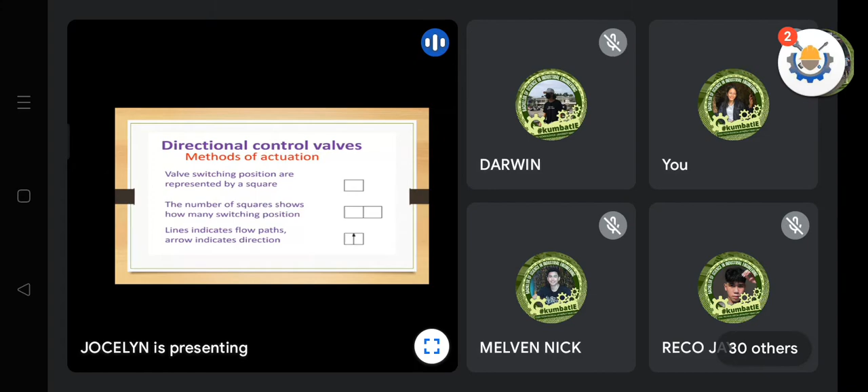So now, your task is valve switching, guys - shifting positions. Remember the 2/2, the 5/2, the 5/3 - those are the positions that we had. Now, any valve switching will be represented by a square, and the number of squares shows how many switching positions, which could be 2, 3, or 1. Now, the lines inside the square, I will give you a schematic diagram.

You need to label what symbols you see in the schematic diagram so you will understand. If you're already familiar with the symbols and labels, then it's easy to see. Any questions? There's no share screen yet.

Okay, cut me off guys. If ever I miss something, let me know. Let it go straight through. Okay, so it's very important, guys. Let me know if it's already okay, and cut me off if there's a problem.

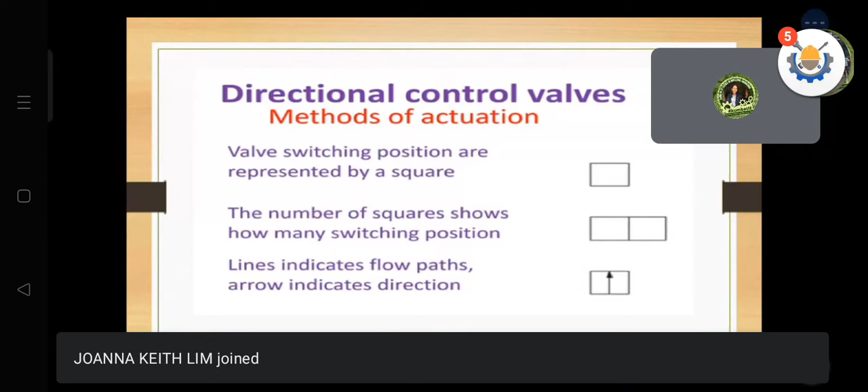So the lines inside the square, guys, indicate the flow path. The indicator shows where it's heading - let's say first step, second, third, or fourth, depending on the valve being used. So the valve determines where the pressure directs the air going to the output, which is on our cylinder. Later on, as we go through the slides, you will understand everything.

So the lines indicate that it is closed. If you see here a vertical line - vertical, then horizontal, then vertical again - once you see this type here, that indicates it is normally closed.

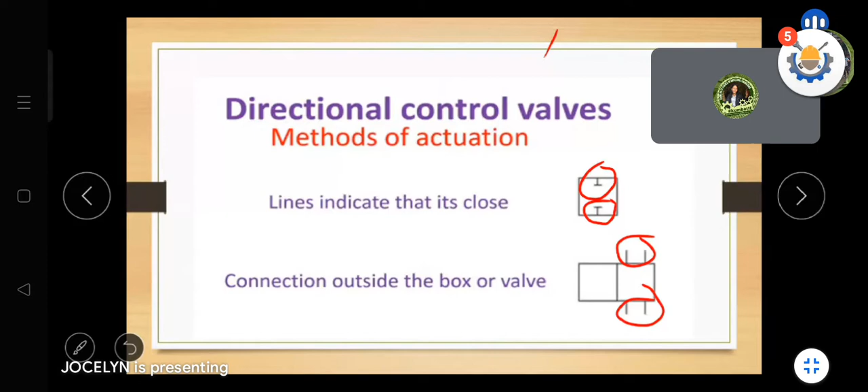Now, the connection outside the box, guys, this is the one here. This will proceed either to the cylinder or to the compressor. That's the way of knowing how we're going to connect this valve to an output or to an input, or any other working actuators.

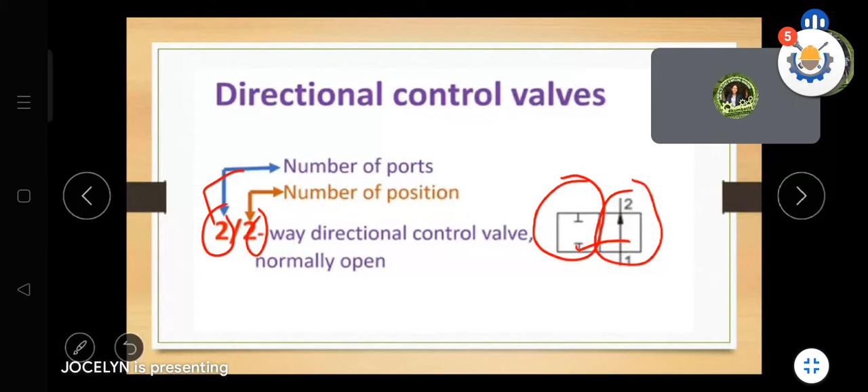This is the one I mentioned earlier - the directional control valves. Here you see 2/2 - the first 2 represents the number of ports, and the second 2 is the number of positions. So the ports determine the box, and for the number of positions, it goes from normally closed to normally open. From here, 1, 2 - that is the position of the valve.

So these are actually the 2/2, the 3/2, until the last topic we have - just a refresher of what we've discussed regarding pneumatic valves. If you see here, this is the actual pneumatic valve when you're going to use a 2/2 way directional control valve that starts with normally open. This is also an example - if you notice, it's used only within that range.

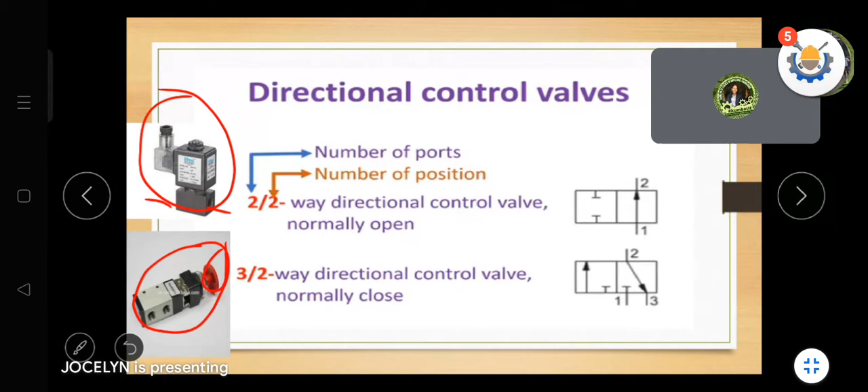Now, for the 3/2 way directional control valve normally closed, this is how it looks. There's manual involvement here - later you'll see it involves manual connections like pushing, like the push button. You see here, the one in red is the manual push button. When you turn it on, air enters, but once you push it, that's the time it goes to the direction of what's done - from 1, 2, and 3. That's the switching part.

So directional control valve, guys, for the 4/2 way direction - this is an example. That one can be mounted, depending on the use and the process we're going to apply it to.

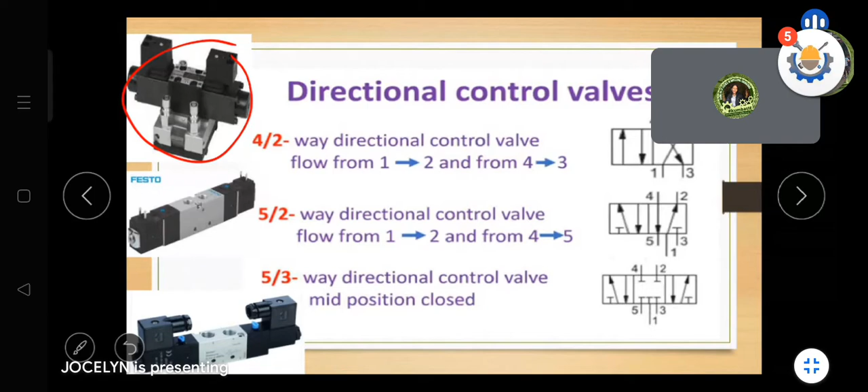We also have the 5/2 and the 5/3 - those are the examples of pneumatic valves. They look big here, but if you see them in actual use, they become small in mechatronics, mounted on their wall, then connected together using wires - to operate the cylinders, whether single acting cylinder or double acting cylinder.

Now, how to read the numbering system. For the numbering system, guys, we have in directional control valve.

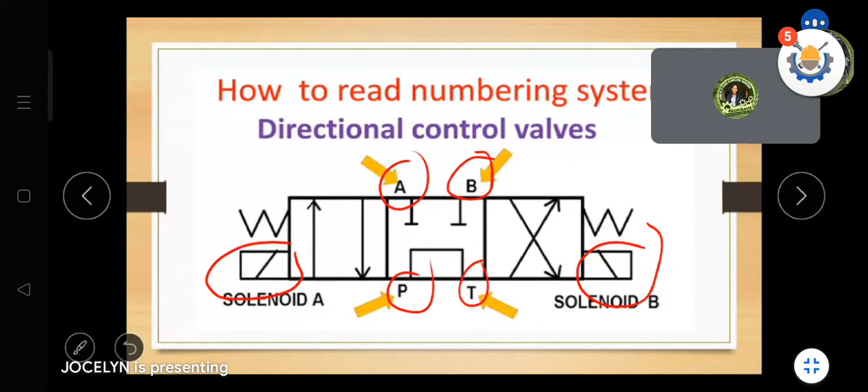So later on you will also see the symbols and signs. This one represents the solenoid A and solenoid B. So you have here directions. You will know what is A, B, P, and T. Now here, this is an example.

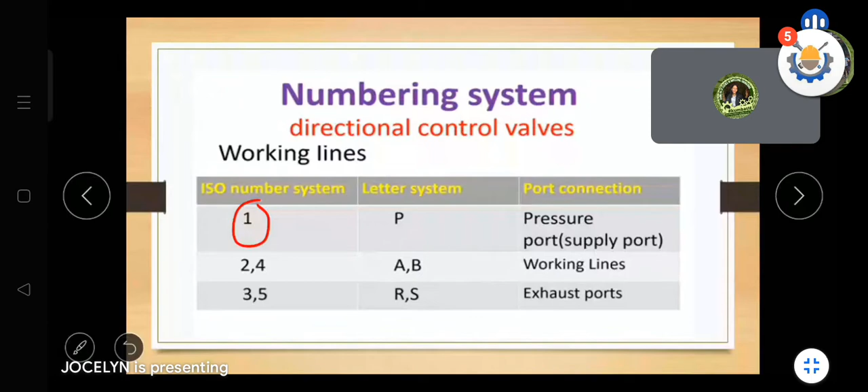So if you're going to check the numbering system, guys, it's already set in an ISO standard number system. When you say 1, guys, that represents letter P, and that port connection is for the pressure port. So if this is 1 here, that is the start. So this is P, that is for the pressure.

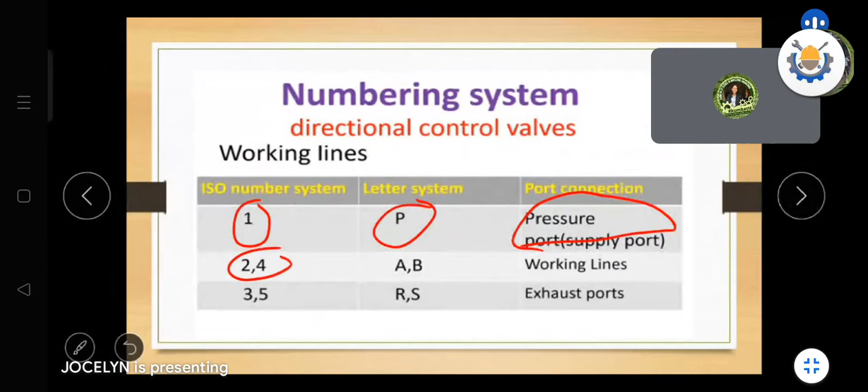Our output goes toward the working machine. So the 2 and 4, guys, that's A and B, that is for working lines. So 2 and 4, that is for the working lines.

See here, so it's A and B. So working lines, guys, and that means this is where we're going to connect the working actuators or the machine that we will be using, for this particular valve.

Now when you say the 3 and the 5, guys, that represents R and S, and that is the exhaust port. So 3 and 5, so it's already exhaust port, and that means once they are already there, so from 2 then it will be going to 3. That means the job has been done already, and then going to 4, which is also back to working, and then rested to 5.

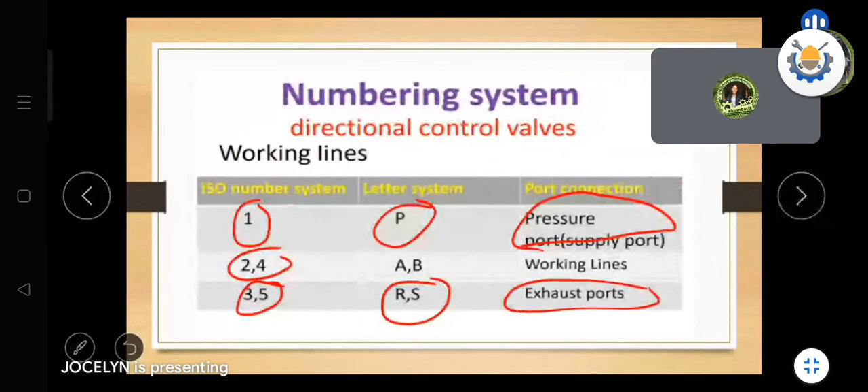Okay, so these are the pneumatic control components and symbols. Okay, so here.

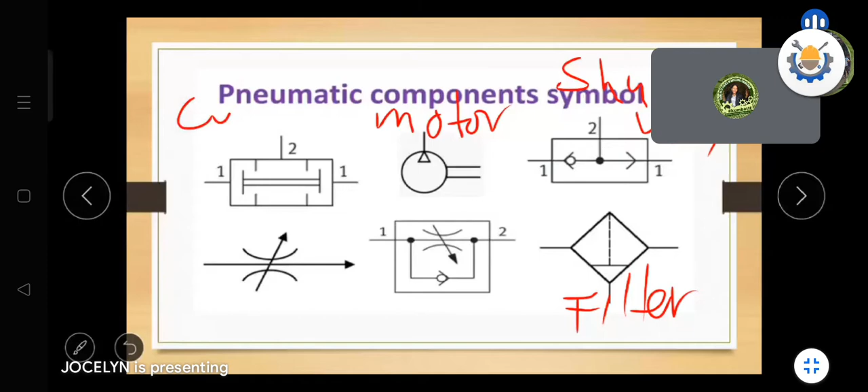Now these two here, I forgot. I wasn't able to remember. But then again, guys, we'll get back to these components. We'll just update those slides here on the one that I have uploaded in the Google Classroom.

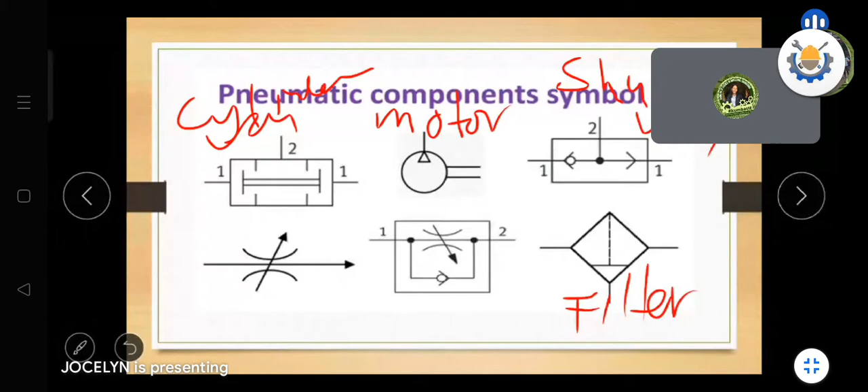Okay, so for the two pressure valve, guys, it has an input A and input B, and then the output Y. So this is similar to a series switch. So the output will not come out if none of the inputs is 1.

If we understand it in terms of logic gates, guys, it is considered as the AND gate. Now as for the gates, AND or OR.

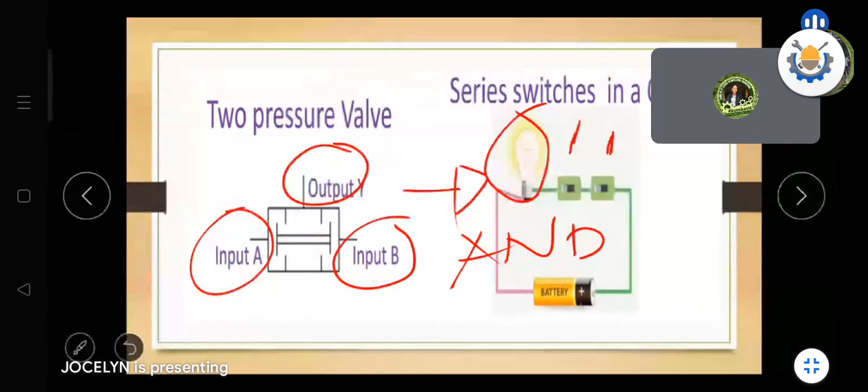So we need to make sure we need to have 1 to 1 value in order to get the output. So that's the presentation of the AND gate. I'm using the AND gate truth table. Using this particular pressure valve, you need to make sure that input A is on and input B is also on to activate or to have the output working. This will only work if all of the input is 1. If one of the input is 0, it's not activated, so therefore we will not be getting the expected output.

So the AND gate is like multiplication, right? 1 times 1, 1. 1 times 0, 0. 0 times 1, 0. 0 times 0, 0.

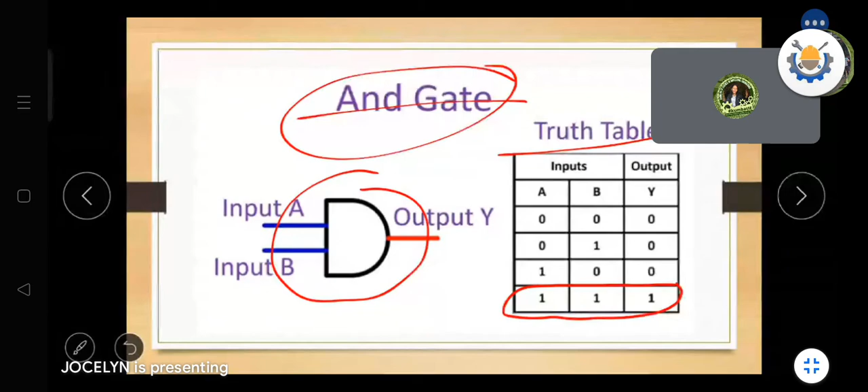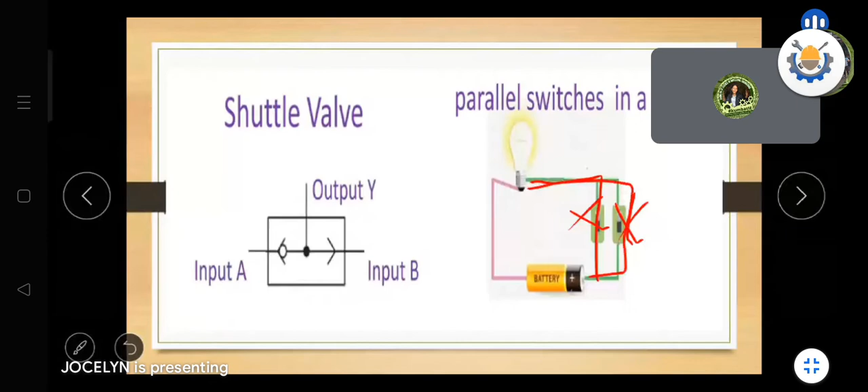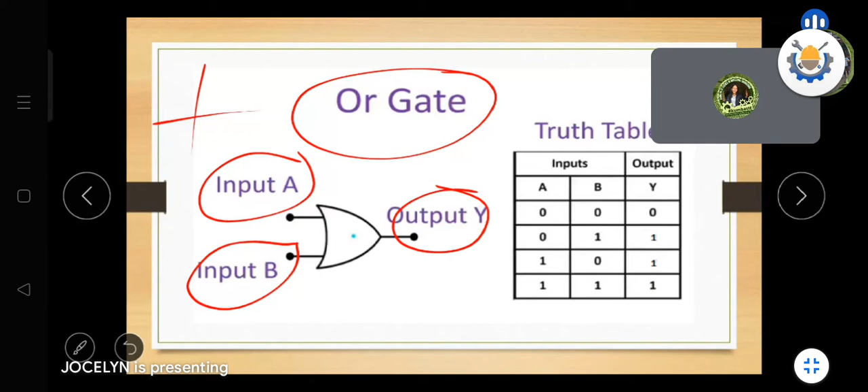But for the shuttle valve, guys, this one looks like a parallel switch. Meaning, if this is 0, it can still connect to the output. Now if this is also 0 and this is 1, it's still going to the output. This is using the OR gate, the plus function. So 0 plus 0 is 0, and if any of the input, either A or B, is on, then the output is 1. So the output is working.

Okay guys, so for the pneumatic component symbols, this is the flow control valve. So this is where, if you're going to see this in the schematic diagram, next meeting we will be introducing you on how to read schematic diagrams and how to label it so we can understand. So if you see this symbol, it represents the flow control valve.

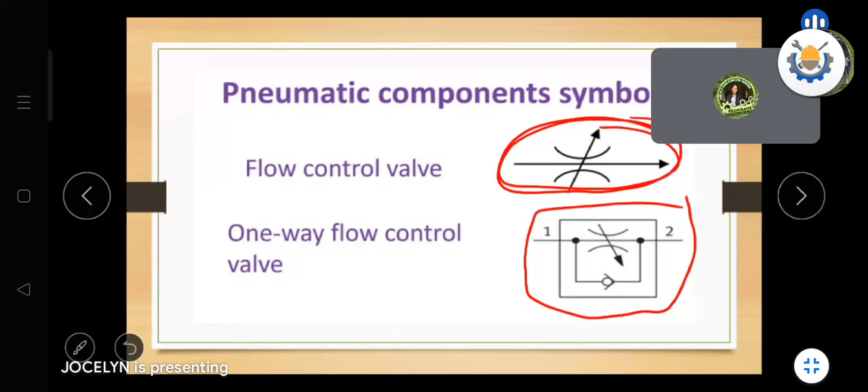Now this one here is a one-way flow control valve. It depends - you can see here it has two outputs, one here and here.

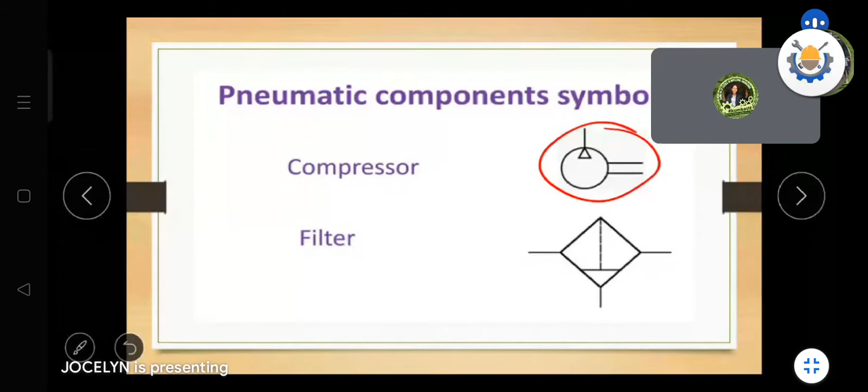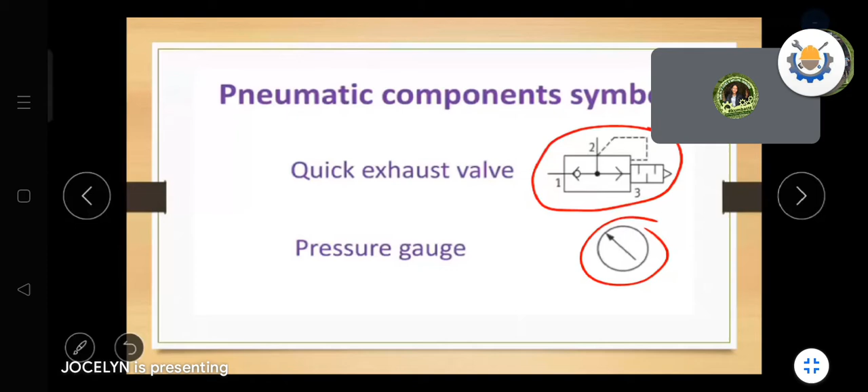Now this one represents the compressor, or could be the motor compressor. This one is the filter. And this symbol here represents the quick exhaust valve. And this one, if you take a look, is the pressure gauge symbol. And you have here the air reservoir. And you can see here the check valve. And then the pressure regulator.

So next meeting, guys, we will be seeing a schematic diagram, and we're going to check all those symbols there and label it, and then we're going to check the flow of the

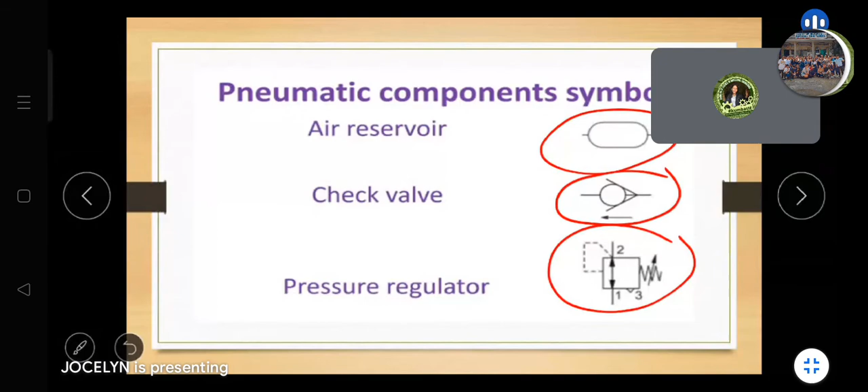working device. Now for the methods of actuation, guys, it could be a spring type or a solenoid. It depends. So solenoid still works the same way, but it is electronically driven. Now it could be a spring, like the spring that

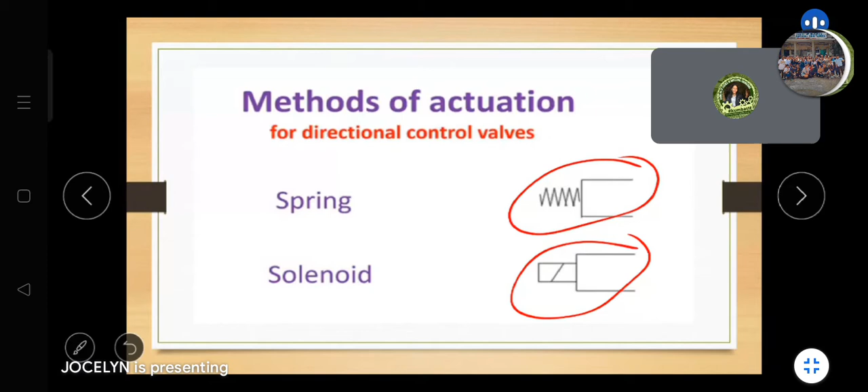for example with the single acting actuators that they're using for spring. The spring is good for one way only, it's good for one direction. Once it's on, it goes straight to that work. It's different from what's used for the single acting cylinder, but for the double acting cylinder, guys, they have two inputs, the push and the pull. So what's commonly used for that is solenoid.

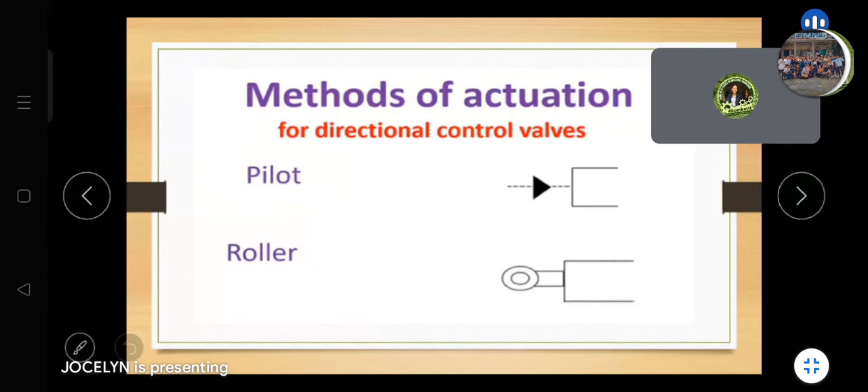Now we have also lever and also the push button. So this is for the directional control valves. And we have also pilot and rollers. So later on, you will see all of these symbols in a schematic diagram, and you're going to read those, what is necessary for the schematic that we will be showing next week.

Now, for controlling a pneumatic cylinder, guys, controlling pneumatic cylinders can be done with the following methods. One is the direct control of single or double acting cylinder. We have also the indirect control of cylinder with single pilot final control valve. We have also an indirect control of cylinder with a double piloted final control valve.

So the indirect control actuation is a pilot signal from a 3/2 NC valve, guys. So 3/2 is another valve, okay?

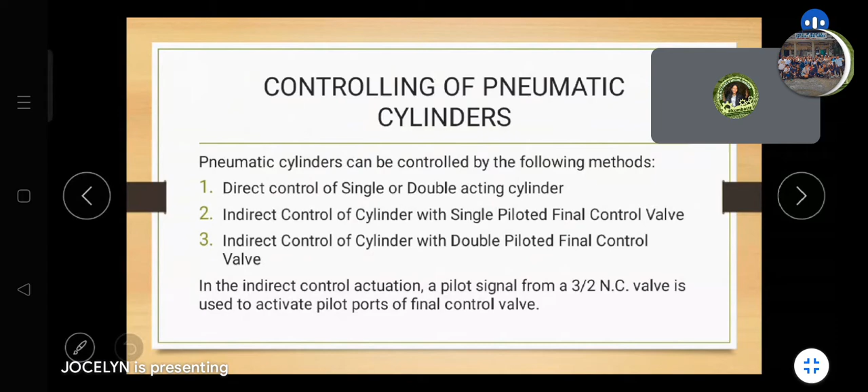NC valve is used to actuate pilot ports for the final control valve. So either we're going to use another port or another valve, or one valve, depende, as long as we are using direct or indirect control.

For direct actuation of cylinders, single acting cylinders perform only in one direction position. Spring type cylinders, usara na siya yung output, padura yun siya gawas. Usara po na iyang connection sa ubos hole, there's only one hole to eject. It is used for return position via spring, and air supply port using the vent hole.

So single acting cylinders for direct actuation is using a 3/2 way valve. So 3 working ports and 2 switching, manually actuated with spring return. Kinahanglan siya i-push to return the manually actuated. So kini siyang mga nakita ninyo sa actuators na itong ipakita ganina, yung mga push button switch.

Now for the double acting cylinder, it performs work in both directions. So it has 2 air supply ports for pull and push, nasa duha ka air supply. And it is using a 5/2 way valve, so 5 working ports and 2 switching, however manually actuated with spring return.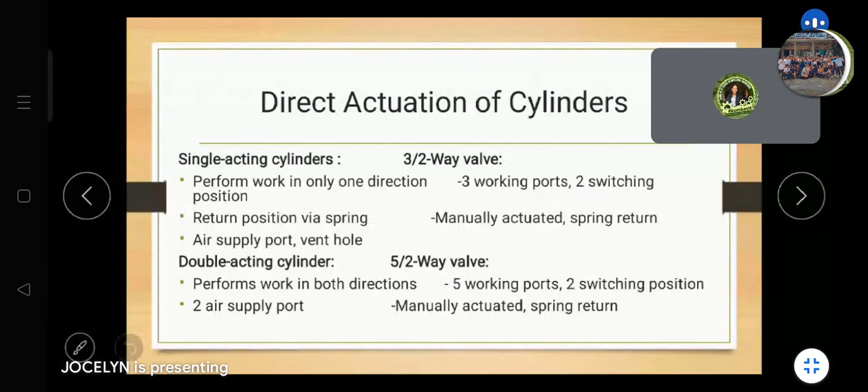So this is how it looks like. If you notice, nakalahi sa single o sa double. Ang single, 1 port na siya, igura na siya mo push here. Ang double siya is nasa duha ka connection, it has 2 air supply port, para sa pabalik.

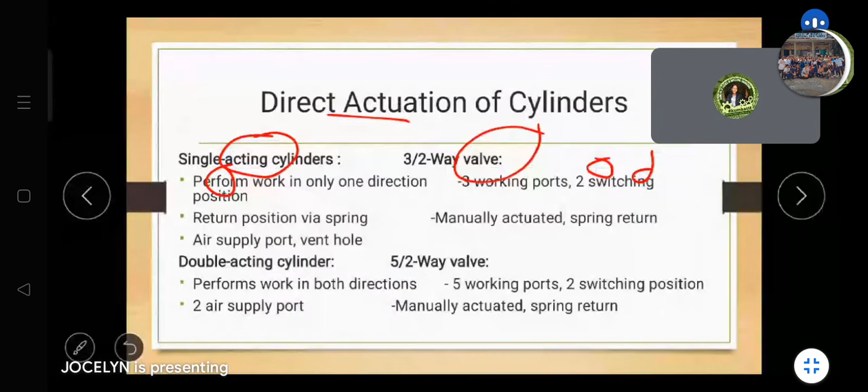Now for the direct actuations, for the single it's using the 3/2, and for double it's using the 5/2. Duha ra ni siya, this one, 1 and 2. So using this is the valve that is used.

If you notice, there is a presence of manual push. So if you're going to push this, what will happen - take a look on the blue lines here. Once it is pushed, it will directly proceed with the cylinders, pushing it towards the output.

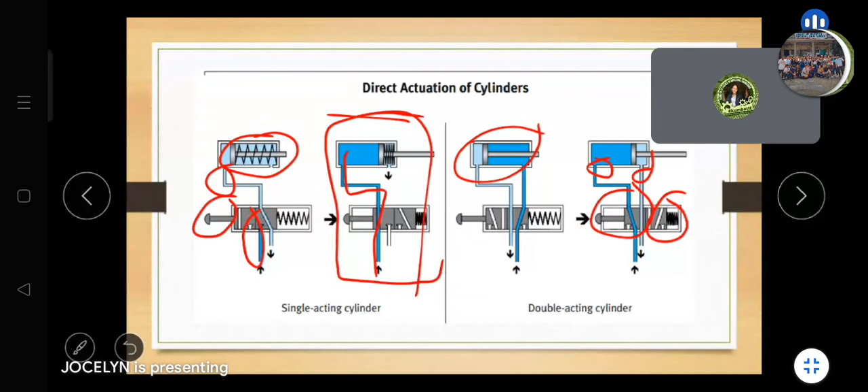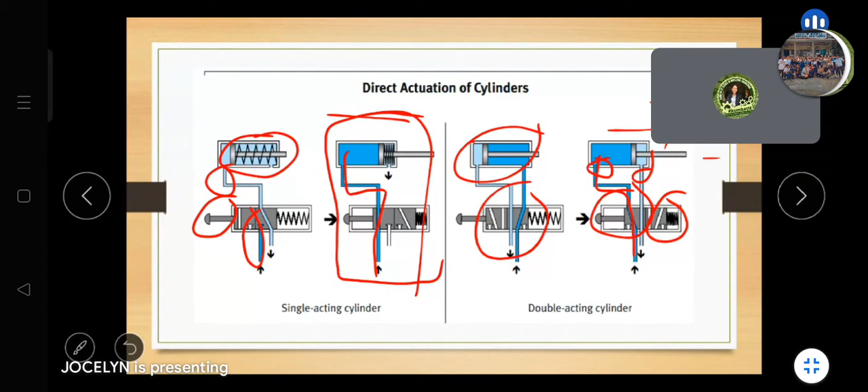Now for the double acting cylinder, you can see this is normally closed here. So once it is pushed, then it will inject air there to release the cylinder. That is how it looks like using the single acting cylinder and the double acting cylinder, but still it is manually driven.

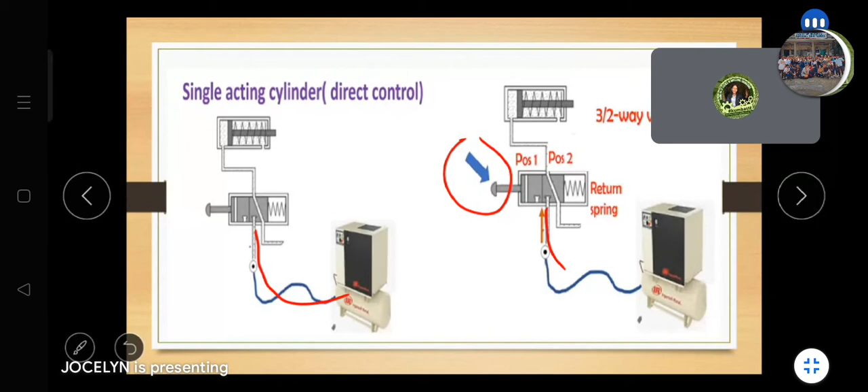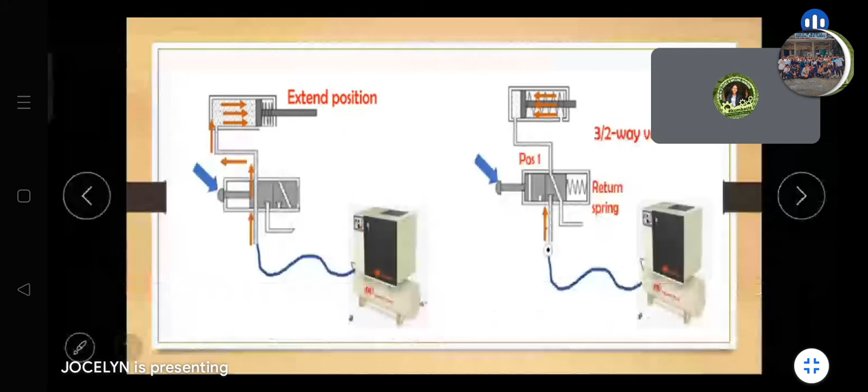So from the air compressor here, take a look. Once imo na siyang i-push diri, once it is pushed, masulod sa dinha, it will open. This is the air, another one. So once it is pushed, na-push na siya, so muna siya, actuate ra, and then it will extend the position.

Mga kuan siya, like for example imong gamiton kay kuan siya kanang naabaroy dire kanang kape or nagkape baron ana, coffee grain. Mo ni siya imong ibutang dinhi ana, naka-close siya, then open, balik siya dire. Depende sa gamit, for example inyong gitrabahoan kay kanang nagpack og kape. So kaysa ikilo-kilo na nimo siya or pila ka grams isudin mo sa jar, pwede na siya magamitan og funnel diri, kani siya imo i-connect din.

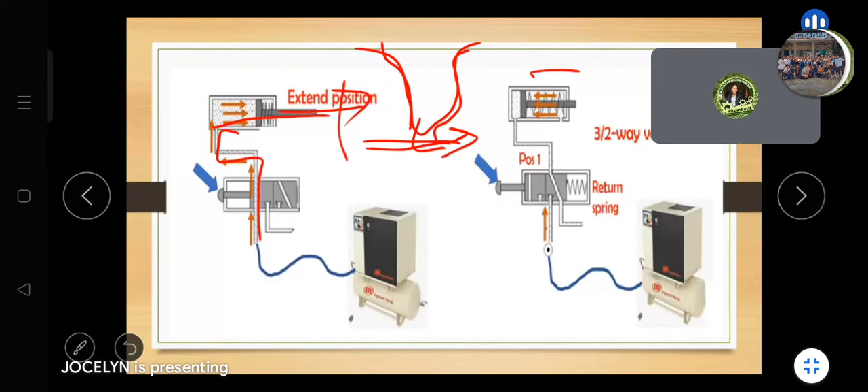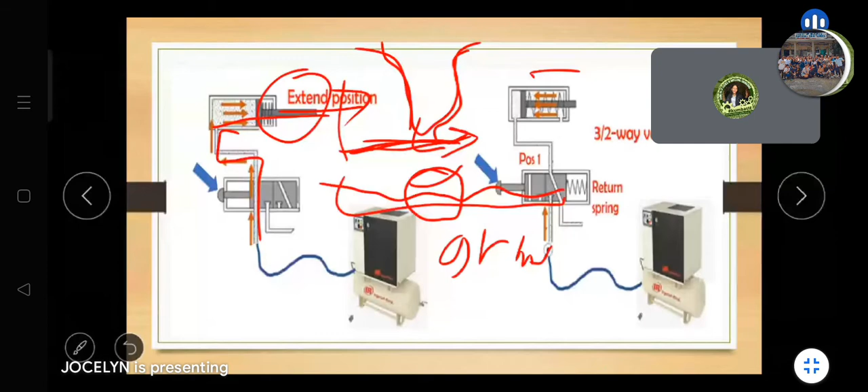So ang output niya ari nas magawa sa ato ang single acting cylinder. So there, it will close here, after na sad open, balik na po siya 5 seconds. Another jar na sad, so naa'y conveyor din nga magdagan-dagan nga mga nagpuno-puno sa jar. Depende ra gyud sa gamit, depende ra sa inyong process nga inyong gamitan.

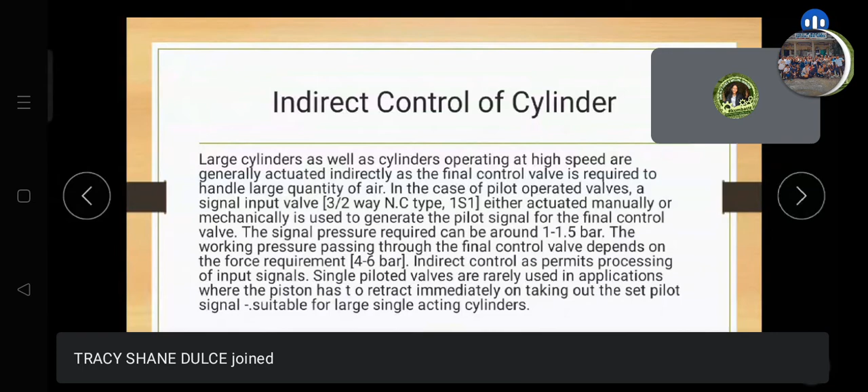For the indirect control of cylinders, large cylinders as well as cylinders operating at high speed are generally actuated indirectly, as a final control valve is required to handle a large quantity of air. So for processes using indirect control cylinders, we are not using just one valve—there could be 2 valves, depending on the process. From the name itself, it's indirect control, unlike direct control where pushing the button directly actuates the cylinder. For indirect control, we could have 2 valves connected, depending on the process we're applying automation to. However, indirect controls are used for large type cylinders.

In the case of pilot-operated valves, a signal input valve like a 3/2 way NC type, either actuated manually or mechanically, is used to generate a pilot signal for the final control valve. Both valves are parallel, but only one is actuated manually—meaning we push one valve button manually and the other valve will be mechanically actuated, using the porting of the first valve used, depending on the program. The signal pressure required can be around 1 to 1.5 bar, and the working pressure passing through the final control valve depends on the force requirements—it can be 4, 5, 6 bar depending on the application.

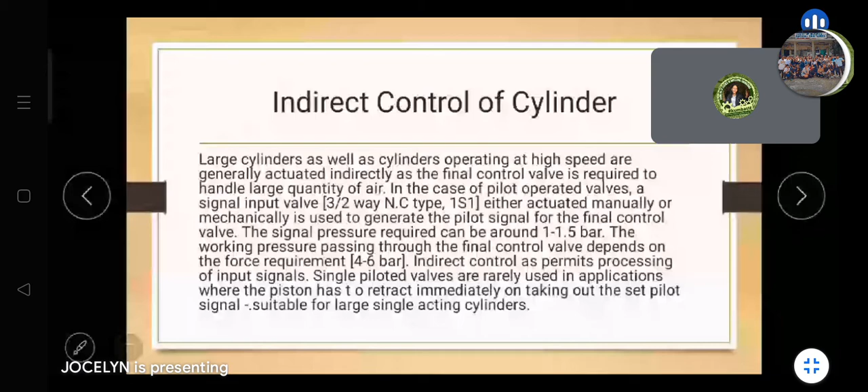Indirect control permits processing of the input signal. Single piloted valves are rarely used in applications where the piston has to retract immediately upon taking out the set pilot signal, so this is suitable for large single-acting cylinders.

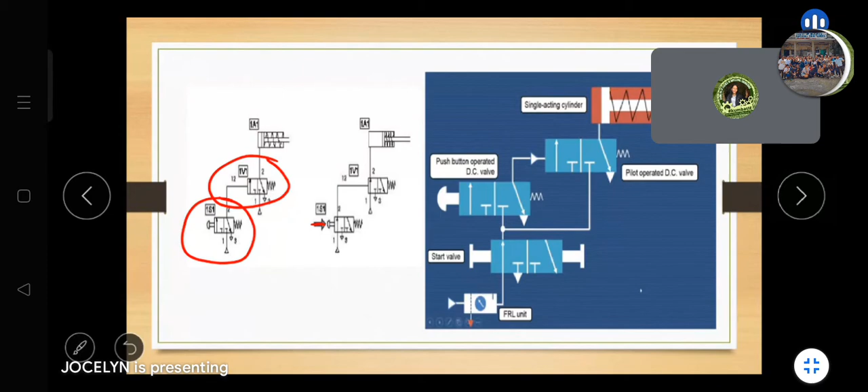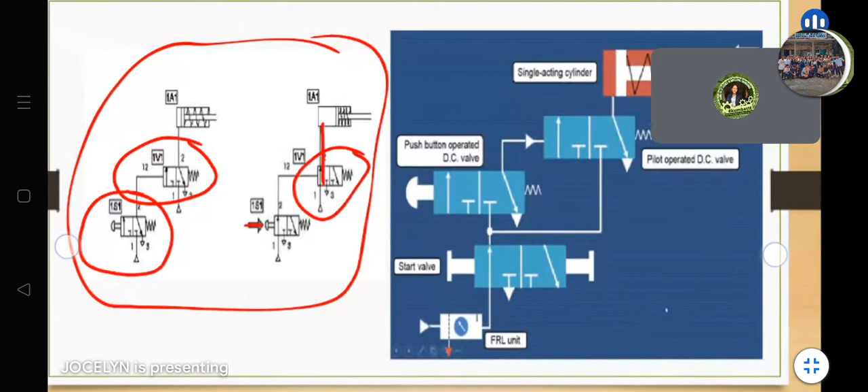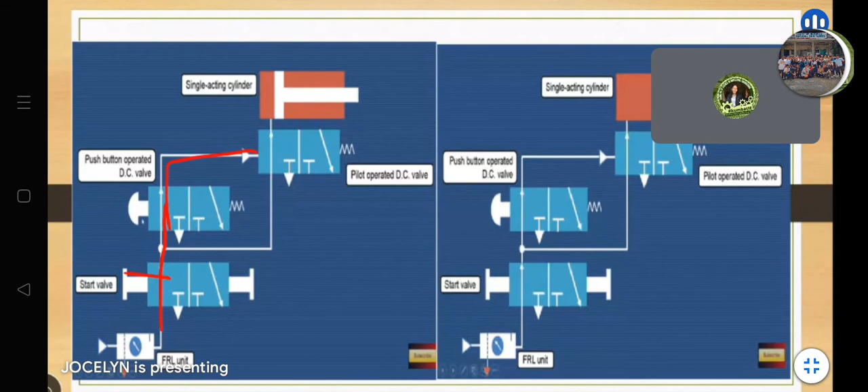This is how it looks like, guys. You have here a manually driven valve, and the other one could be connected to a mechanically driven valve, same as shown in this picture. If you notice, when we push this button in this schematic diagram, it will go directly to the next valve, and that valve will directly open the single acting cylinder. It's still waiting for another valve, so that's why there is no direct connection to the cylinder—this is for the single acting cylinder. Once it is pushed, the air pressure comes in; it could also be pushed electronically, depending on usage—it can be a push button type DC valve. Then it will go directly to the single acting actuator.

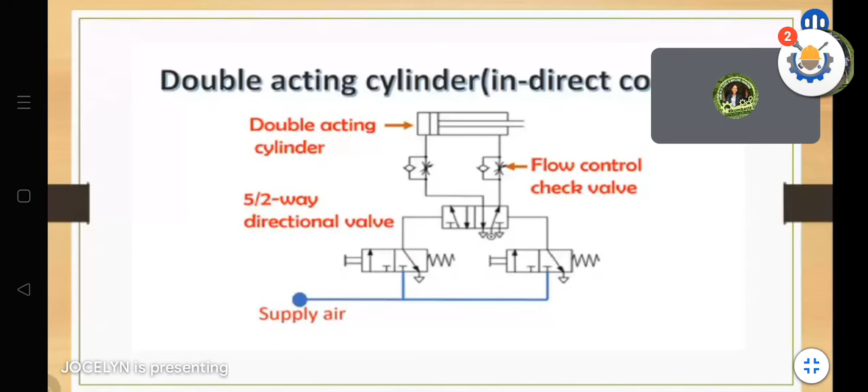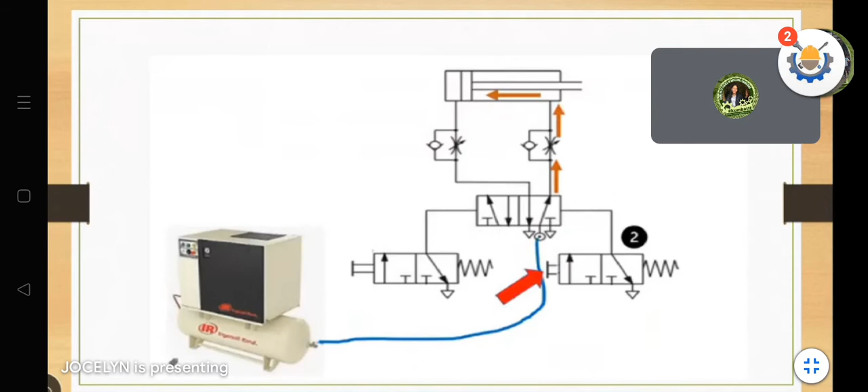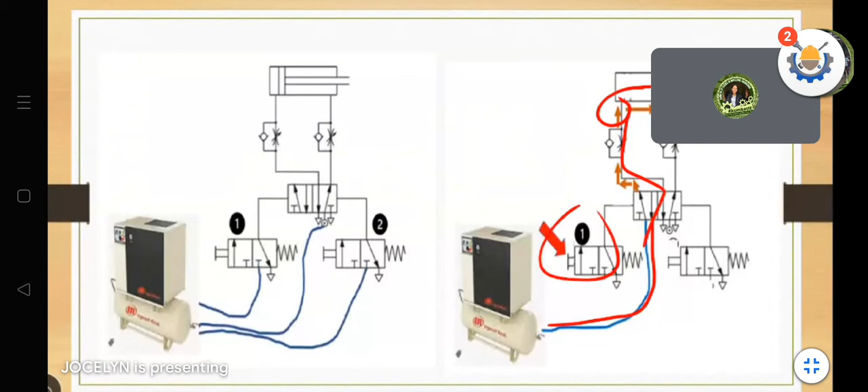Now for the double acting cylinder using indirect control, we have the double acting cylinder and the flow control check valve. Look at the schematic, guys—we'll label everything here, we'll go through it next time since it's confusing, even for me. So there's a 5/2 way directional valve and the air supply—this is how it looks. You see here the two valves connected. Once it's pushed here, it will go directly to this valve. Since it's double acting, it has two air ports. So depending on which way it goes, one valve will push the cylinder and the other valve will pull the cylinder.

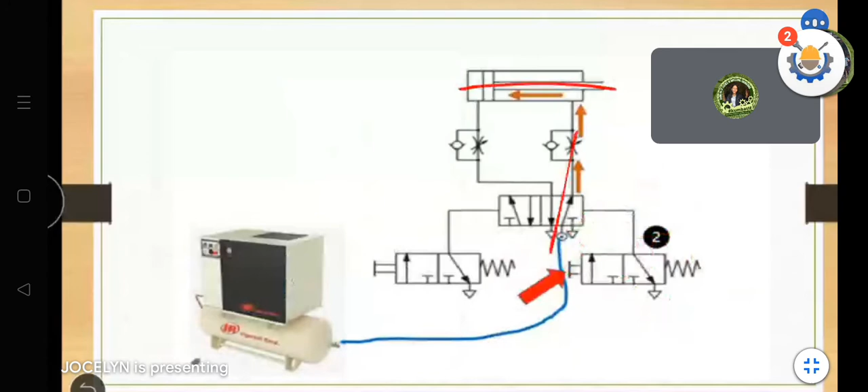For the structure of a pneumatic system, guys, we have the single flow, from bottom to top. We also have the control chain. For the control chain, you can use either the SPA principle or the IPA principle.

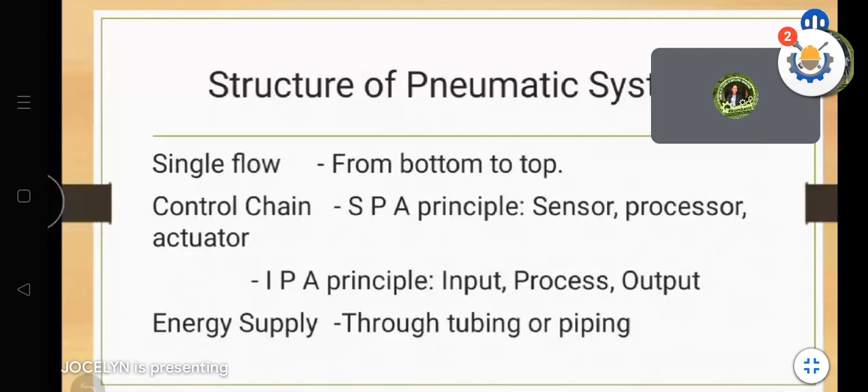Now the energy supply that we have here is through tubing or piping. So we have the tube there that's connected. If you notice, last time in our discussions we mentioned about pipelines and the nomogram used in calculating the diameter of the pipeline depending on how much pressure or force is needed for the process to work. So this is how it looks like, guys.

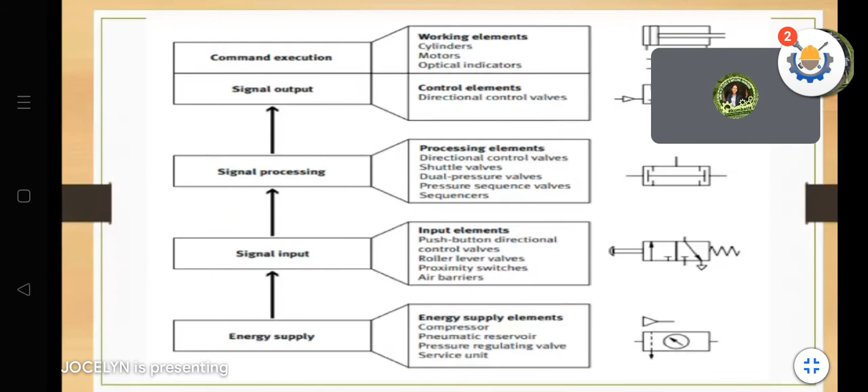So here, from the command, what you see on top is the command execution signal. For the command execution signal, that's on the outputs.

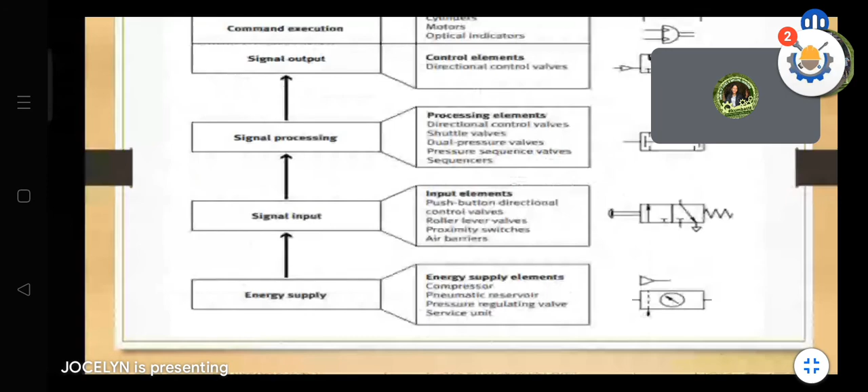So first we have the energy supply elements. What are those? We have compressor, we have also the pneumatic reservoir, we have also the pressure regulating valve, and then the service unit. That's for the energy supply.

From the energy supply, it goes to the signal input. What are those input elements? It could be a manual push button directional control valves, or roller lever valves, and it could be proximity switches or air barriers, depending on what type of signal input you're going to have.

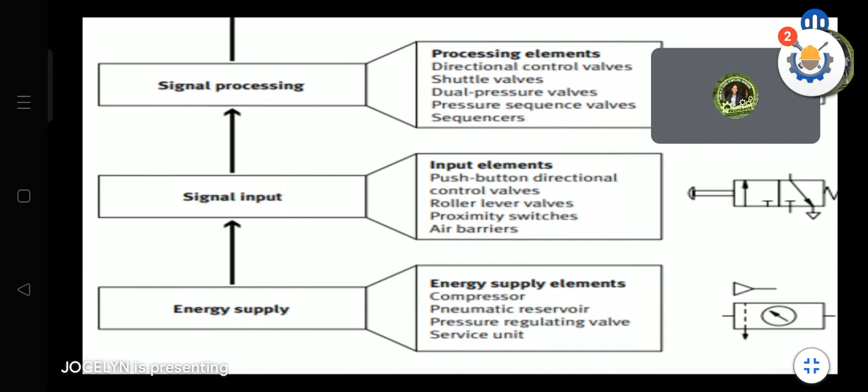Now from the input, it goes to the process, guys. So what's under process? You have here the directional control valves. Depending on your valves, it will do the switching to wherever. So it's what actually chooses the direction before it activates. So you have there the shuttle valves, dual pressure valves, pressure sequence valve, and the sequencers.

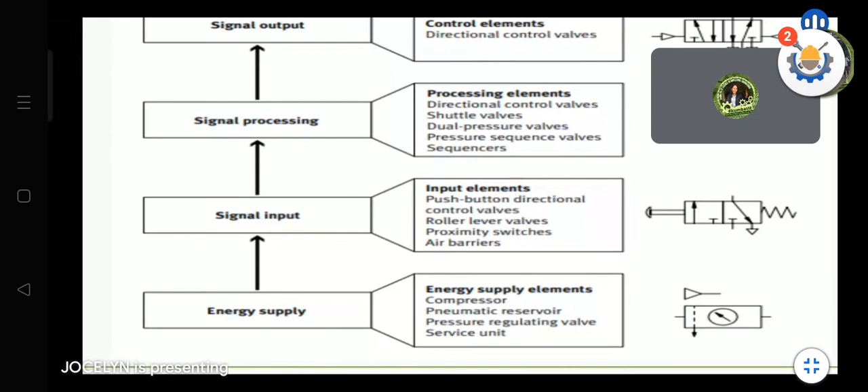It depends on the process that you're automating. So depending on the process you're going to automate, that determines what type of process elements you're using. And from the process, it goes to the output, to the execution command. So you have there the cylinders, the motors, the optical indicators, or the control elements, which are directional control valves or non-directional control valves.

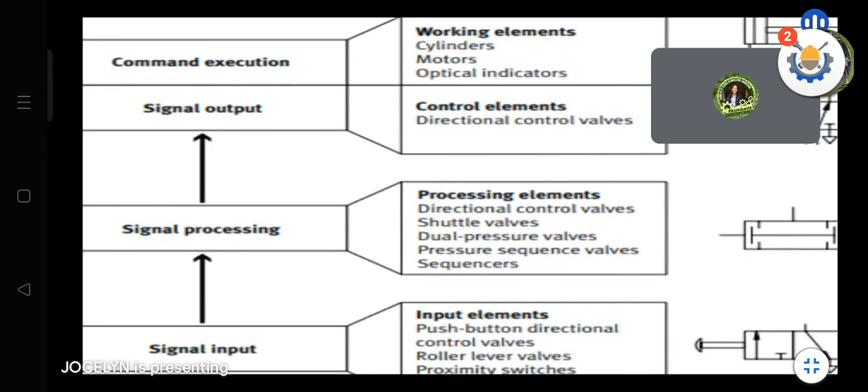So this is the structure, guys, this is the structure of a pneumatic system. So we start here first with the hardware, which is the energy supply, our requirement, and that's the air needed. So in this particular manufacturing, what are we going to automate?

For example, let's automate this: it could be like the flowing of jam, the flow of jam into bottles, packing of the jam. So instead of doing it manually by people, we machine and automate everything. So all the jam gets loaded onto its panel, into its container where it will flow.

Okay, then we will be using their funnels. Instead of pushing on and off manually, we can program it using a double acting cylinder or single acting cylinder. So to open and close, on and off, we determine how many milliliters will come out in 1 second, 2 seconds, 3 seconds, and so on. Then we'll do the packing, then it moves next to the sealing, which needs to close. So that's usually how it goes.

So if you see, guys, if given a chance in your higher years, before you graduate, hopefully you'll have a company tour so you can see the different processes in the industry and how automation is done in those processes, so that you become familiar and can relate it to what you've actually learned in pneumatics, in your mechanical subjects, in electrical, in computer, or whatever is in your curriculum, which I'm not familiar with. Those are the processes and expertise you need to know. So hopefully you can apply and see it in the industry before you move out of the campus.

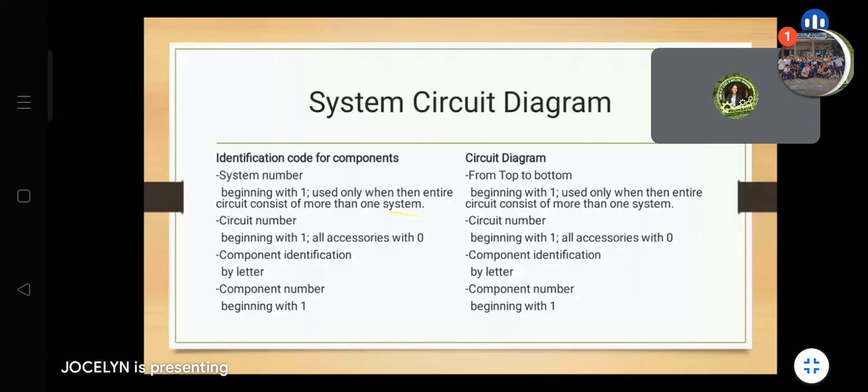For the circuit diagram, guys, we're going to do identification of codes of components. We'll add this circuit diagram next meeting, along with an activity on understanding symbols and putting labels on the schematic diagrams that we'll be having next meeting.

That's the only discussion I have for you today, guys - getting familiar with indirect and direct acting control of the cylinders, the direct and indirect actuations of cylinders, and also getting to know the signs and symbols for valves and actuators. These are the components we need to understand in terms of pneumatic components and symbols, so that we can read schematic diagrams and make a design.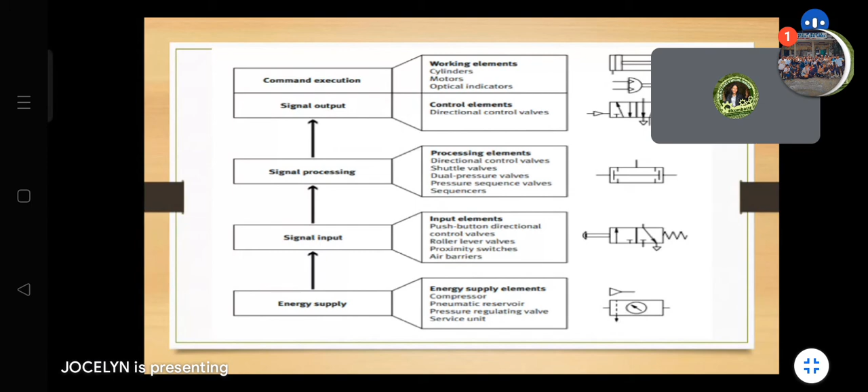Hopefully, guys, we get there in making a design - that's upon the design. So hopefully we'll just cross our fingers, because honestly, to tell you, this is really a tough subject. I myself don't actually have much idea about pneumatics - what I only have is about PLC. But then again, everything can be learned, so I don't want to make it feel too hard for you guys.

Anyway, in our curriculum it says basic pneumatics, so we will just do the basic, not the advanced thing - let's just leave that to mechatronics. So what we'll be doing is the basic pneumatic circuit, which we will complete before our midterm examinations. Sequential control and electro-pneumatic designing are also part of the semifinals, before we finish everything in the finals, which covers the introduction of PLC. That's how it's going to be in this subject, guys.